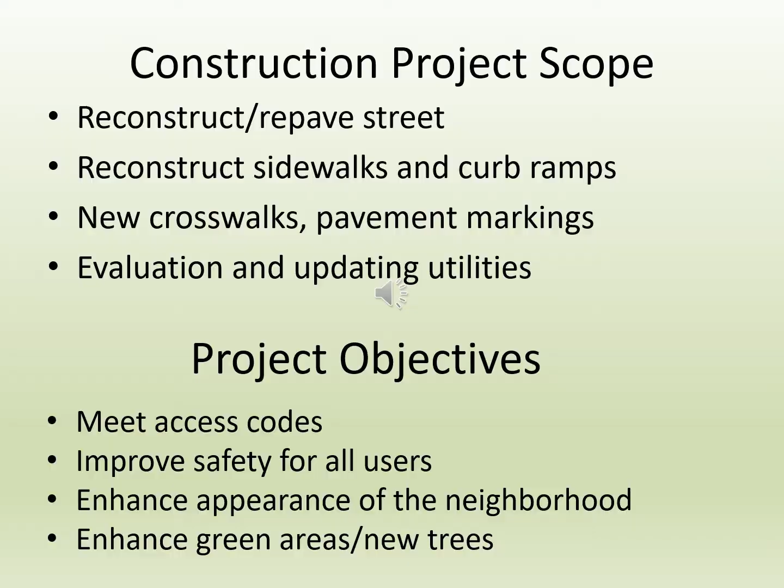The City Council adopted a Complete Streets policy in 2016. The goal of that policy is to design streets to enable safe access for all users regardless of age and ability. Vision Zero is another important policy you may hear about. The City Council adopted a Vision Zero policy in 2016. Vision Zero calls for the elimination of fatalities and serious injuries resulting from traffic crashes, and the city is very committed to this goal. In addition to Complete Streets and Vision Zero, the city has several other policies and plans that form the basis of our approach to street reconstruction.

The Cambridge Growth Policy and Vehicle Trip Reduction Ordinance places an emphasis on sustainable modes of transportation to promote livability, improve air quality, and reduce greenhouse gas emissions. The city's pedestrian plan, bicycle plan, and transit plan emphasize improvement, safety, and operation for sustainable modes of transportation. Their goal is to provide a transportation system that is sustainable and efficient and moves people safely.

The Cambridge Climate Plan and recently completed Urban Forest Master Plan document our commitment to maintaining a healthy environment in the face of a changing climate. These plans include specific steps we can take to slow down climate change by lowering greenhouse gas emissions and help us reduce impacts of climate change. For example, providing increased tree canopy to reduce impacts of increasing heat waves.

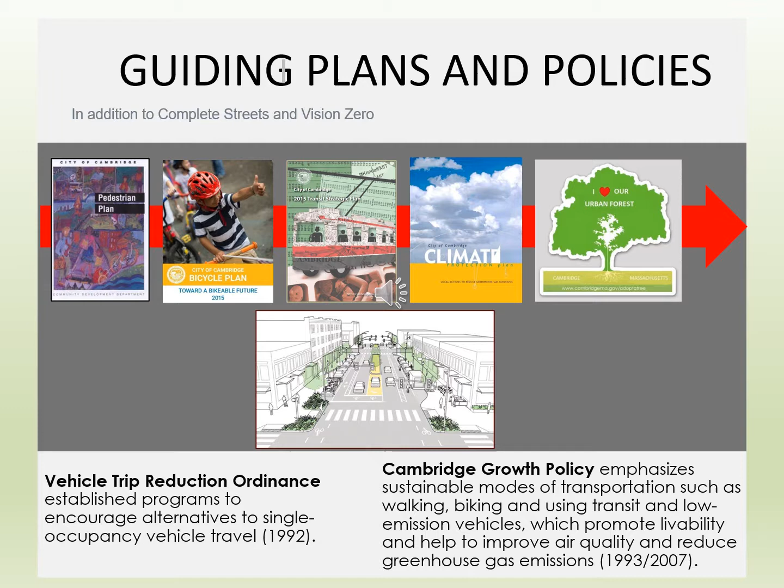So how do all of these plans and policies translate to specific street and sidewalk designs? Let's go through some of them, starting with accessibility. Why is accessibility important? First, it's the law. Both federal and state regulations cover the construction of sidewalks and require newly constructed sidewalks to be accessible. And two, more importantly, it's the right thing to do. We want our sidewalks to be as inviting and usable as they can be for people of all ages and abilities, such as people using wheelchairs, walkers, or pushing strollers.

What is required to make a sidewalk accessible? We typically think about the condition of the sidewalk. Is it smooth, or are there trip hazards or other impediments to people using mobility devices? We also think about the cross slope of the sidewalk. How steep is it, or how steep is the sidewalk that goes across driveways? As we are reconstructing sidewalks, we need to identify and address these deficiencies.

At existing pinch points, the city is required to provide 36-inch clearance to meet accessibility requirements. Where this is not possible, the city must provide a 48-inch accessible path around the existing pinch point. This slide includes some of the basic design tools we use to achieve accessibility.

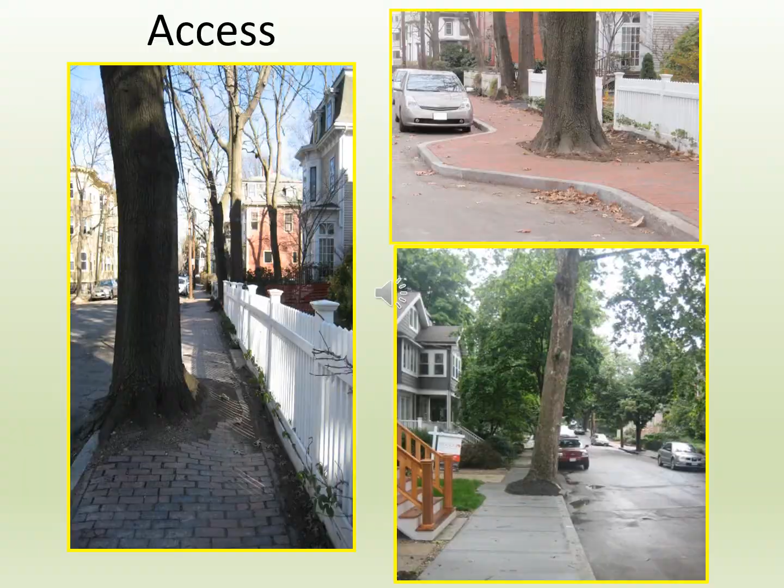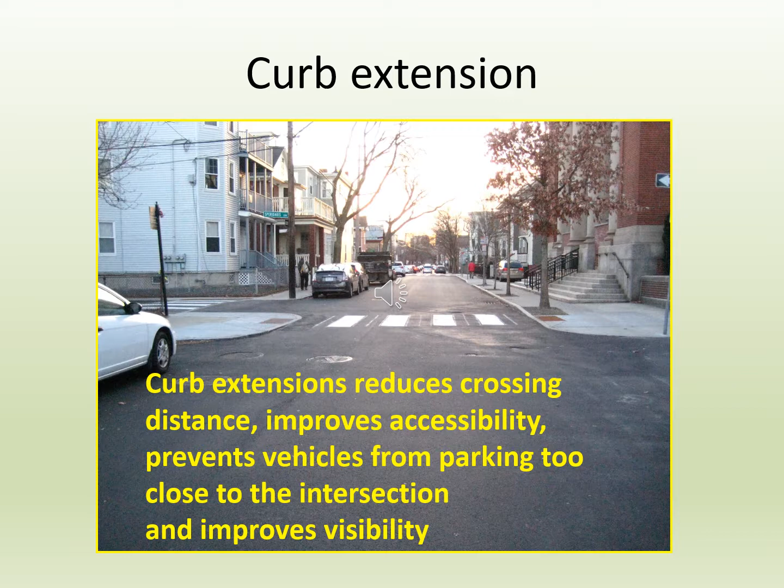Another pedestrian safety improvement is the implementation of curb extensions. Curb extensions reduce crossing distance, improve accessibility, prevent vehicles from parking too close to the intersection, and improve visibility of both pedestrians and drivers. Raised intersections reduce vehicle speed, improve accessibility, and improve visibility.

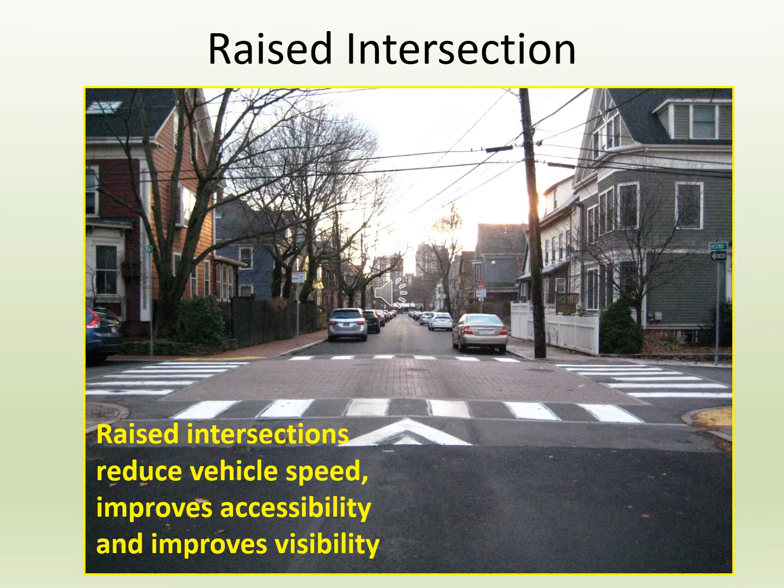Green infrastructure, or GI, is a part of our efforts to improve the quality of storm water before it is discharged from the local drain pipes to the Charles River or Alewife Brook. GI refers to a variety of techniques which use natural processes such as specially selected plants and soils to promote infiltration of stormwater into the ground or to remove pollutants such as phosphorus from stormwater.

The city has successfully implemented GI on a variety of roadway projects, ranging from major corridors like Western Avenue to residential side streets in West Cambridge. We are committed to incorporating these types of environmental improvements into smaller projects as conditions and space allow.

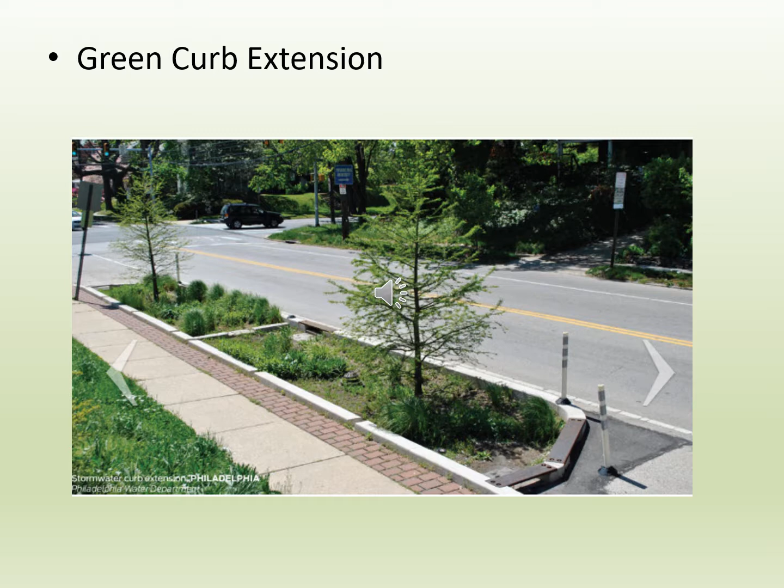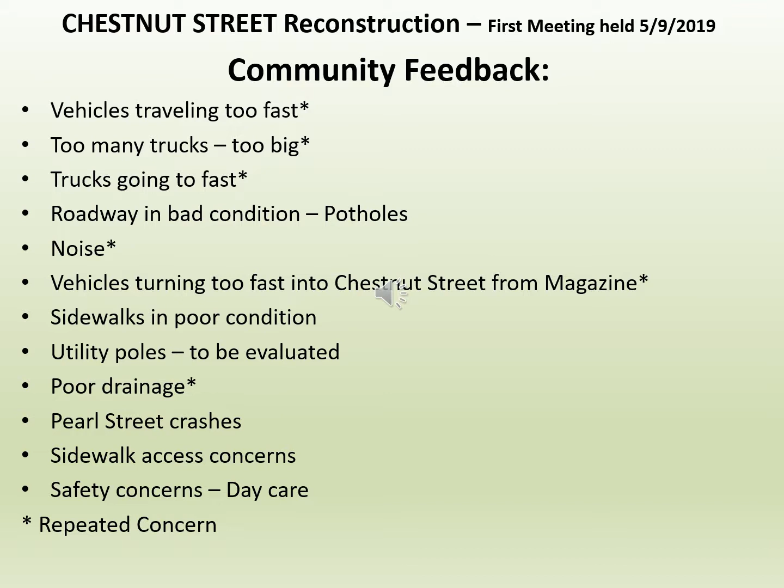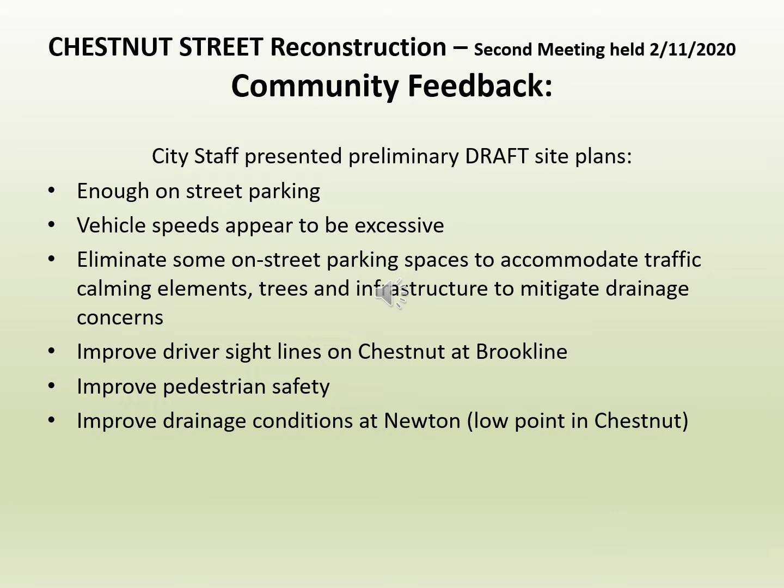How did we develop the draft plans we are presenting today? Here is a bit about the design process. First, community input. This was obtained from the first and second community meetings. Next, city, state, and federal policies. And third, we met with the fire department to discuss hydrant relocations.

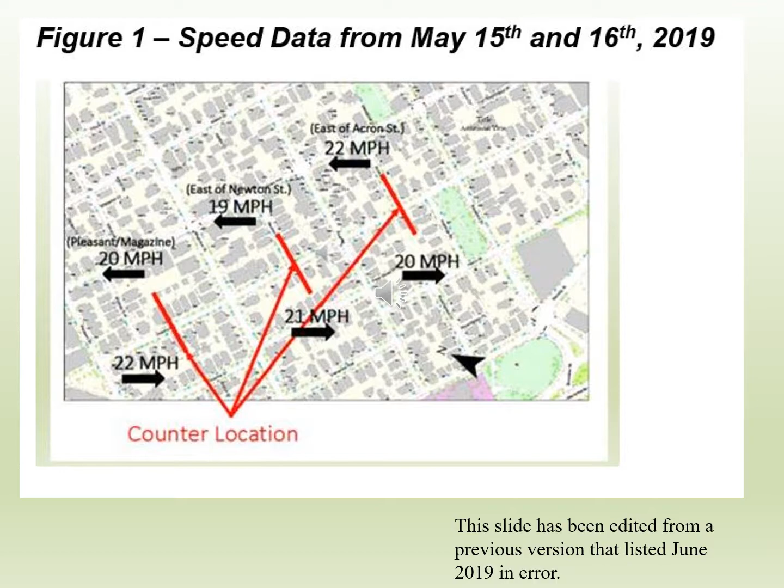In May 2019, the city collected speed data from 3 discrete locations. The next 4 slides present a color rendering of the proposed draft design for Chestnut Street.

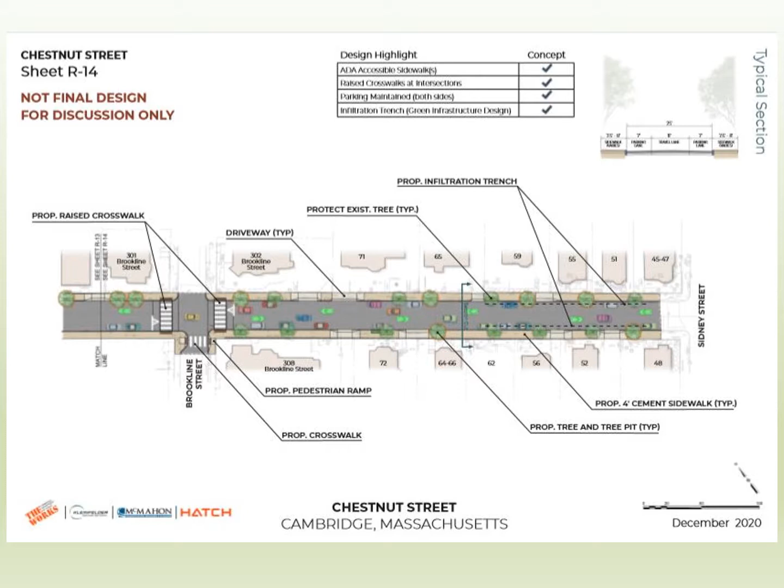Construction impacts are understandably what residents and businesses are usually most concerned about. Construction is disruptive, loud, sometimes messy, and frustrating. The city is committed to working with residents and businesses throughout the construction project. Each project is assigned a project manager and a community relations manager.

That team works with the contractor and with residents and ensures that there is clear communication about what is going to happen, when it will happen, and what it will mean for neighbors, whether it's an annoyance like the temporary loss of a parking space or something more disruptive like a temporary water shutdown. Projects in the city have standard working hours of Monday through Friday, 7 a.m. to 4 p.m. We expect our contractors to implement and maintain safe and effective traffic management plans to assist pedestrians, cyclists, and vehicles traveling through the project area.